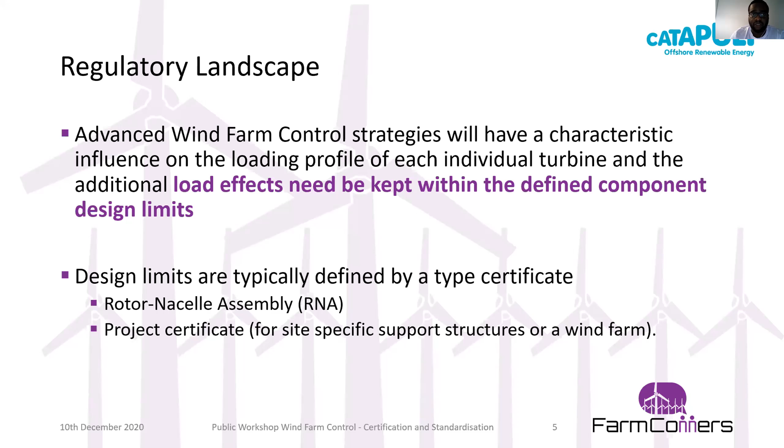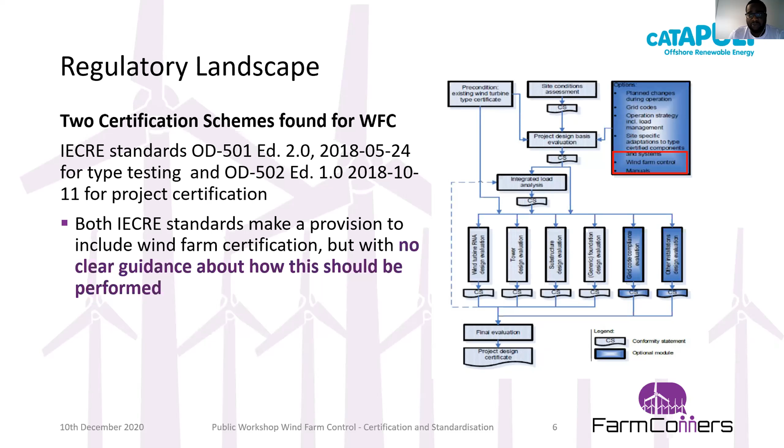In terms of certification schemes, what we found out was there are two certification schemes for wind farm control, both IECRE standards listed here. As much as they are there and there's a mention of wind farm control, what was noted is that there was no clear guidance about how these should be performed in these documents. And that's just a diagram that summarizes the certification scheme in the document.

Another aspect is the DNV GL service document, where in the updated version to be published in 2020, wind farm control is to be considered in the site-specific design assessment, SSDA. That's the diagram on the right. This includes a minimal analysis or review of the listed bullet points, such as the wind conditions of the site, the wind farm influence, site complexity analysis, and site-specific extreme loads.

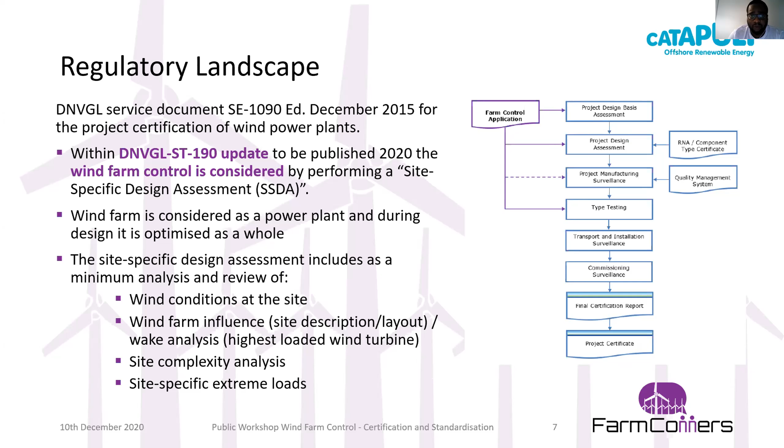The other aspect is farm control functionalities, which was more about the different novel control approaches being used at the moment, and there was a review on some of them. These are the two listed out of the document: axial induction and wake steering. Axial induction has to do with modification of the energy harvest of either upstream or downstream turbines, so that the wake interaction effects can be mitigated.

The challenge we see there is that although this is seen as one of the techniques that could foster wind farm control, wind tunnel tests and field tests still call into question how this might actually be used for wind farm power increase.

Wake steering is when you use yaw misalignment, which is one of the more promising techniques, and steer the wakes to modify how the downstream turbines react, reducing the wake interactions in the wind farm. That's seen as a promising technique, and it has also been tested in real wind farms.

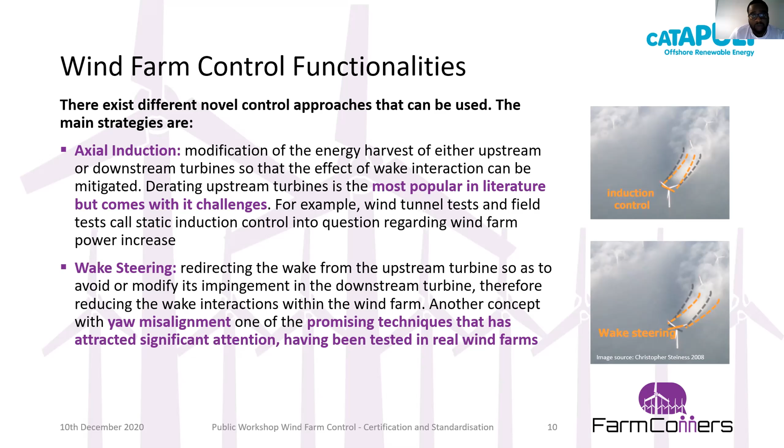There's some other ones mentioned in the document, which everyone is open to have a look through as well. And so we did a review on that. We also looked into aspects that have to do with the integration into the existing wind power plant

control of wind farms. And what was proposed here was the hierarchical design requirements way of doing this, where there's a 3-level hierarchy, the lowest level based on optimizing the energy harvest from the wind farm, and the very high level focus would be the safety and structural integrity of the wind farm as well.

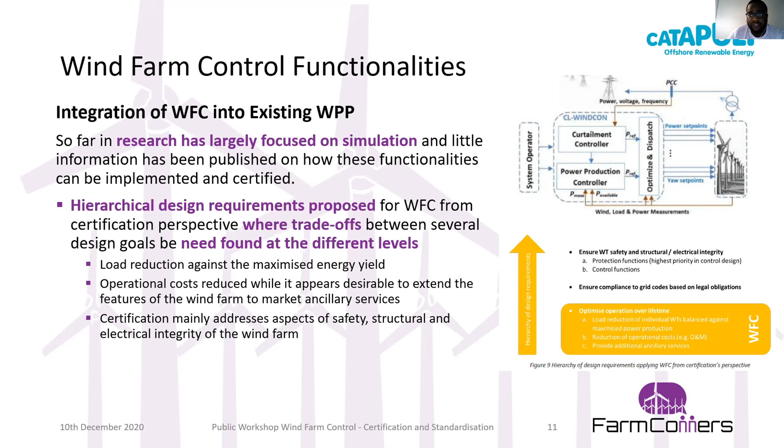So in here, one of the things we discuss is that there needs to be some sort of trade-offs between the several design goals, which need to be found at those different levels as well. And the list of bullet points here explains a bit of those, such as load reduction against maximized energy yield, and certification issues, which mainly address aspects of safety, structural and electrical integrity of the wind farm.

Wind farm economics was another aspect looked into in this position paper. And in here, we reviewed the different electricity markets. And the summary here was that for wind farm control to participate in electricity markets, this would depend on having very robust algorithms or control systems that can coordinate the control actions.

Also adhere to the different market participation rules, and also importantly abide by the grid codes for the normal operation of the wind farm. Two recent developments were noted in this report.

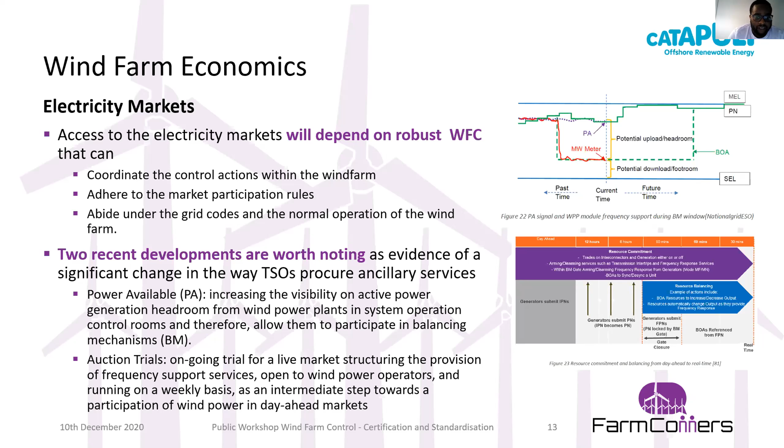One was the power available scheme, which is where the wind farms are allowed to provide headroom capacity, and that's sent over to the TSOs in their operation control rooms, so they have an idea of what that headroom is, and you're able to participate based on that in markets such as balancing mechanisms. Also, auction trials, which open up the wind industry to different markets such as the day-ahead and intraday markets as well.

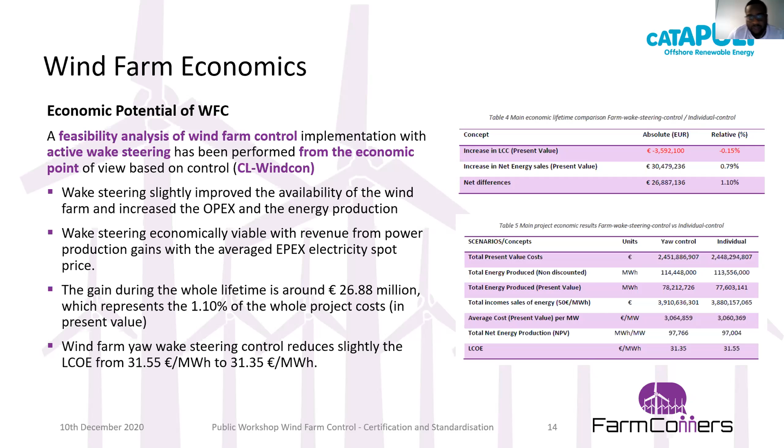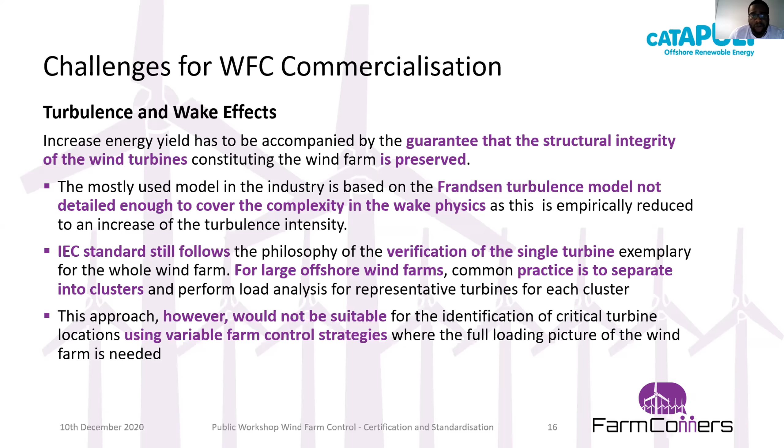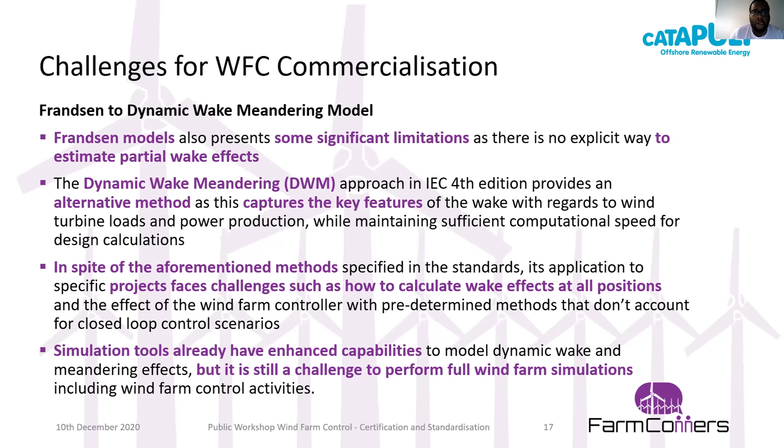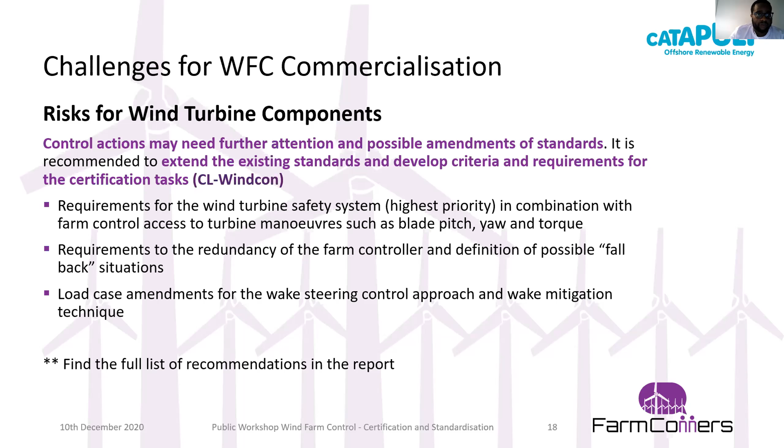Finally, in challenges were the risks for the wind turbine components. Here was a list of recommendations, which was to develop the criteria requirements for certification, to go a bit further in terms of the standards. Three are listed here, but there's a full list of the recommendations in the report, which you could look at in detail at a later point.

And finally, the proposed solutions. I think Nikolai will be giving a bit more detail in a couple of minutes on the first two, which were temporary and conditional product certification. This is an approach which extends the conventional site-specific design assessments to include additional inputs for wind farm control strategies, and also how risk-based certification can be carried out to issue certificates, to help assess the safety concerns with the wind turbines and the wind farm.

Finally, the proposal was also to see how we can start to use regulatory sandbox approaches, which are ways where you could implement novel strategies with an exception from the obligation to comply with existing regulations, such as grid codes, and gives a safe room to do trial studies with these wind farm control techniques when developing them.

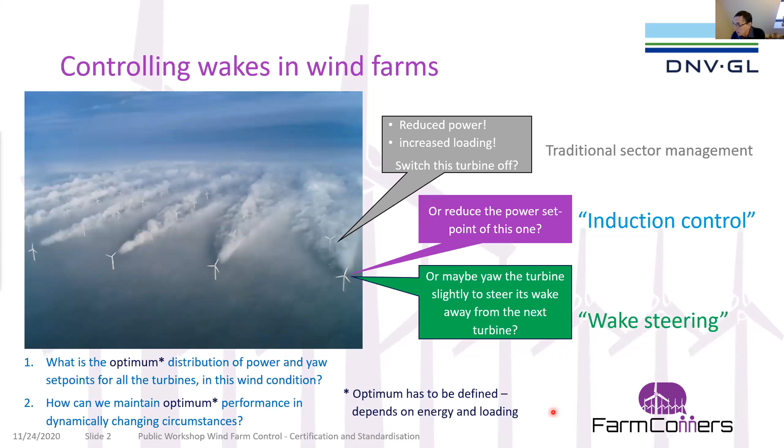Okay, good. So this is about turbine loading in wind farm control: requirements and modeling approach. And the next slide, yes. Well, I don't need to spend time on this one. This is just showing the difference between steering and induction control and the need to find optimum set points for turbines in the wind farm. And how do we define the optimum? Because it depends on energy and loading. That's another old slide.

Modeling requirements for this. So we are concentrating on the engineering models here, which are fast, but in some senses low fidelity models. We need to have a detailed representation of the turbine wakes in different atmospheric conditions. We need to be able to model realistic time varying wind conditions, accurate modeling of turbine control dynamics, and we also need time domain simulations long enough to capture the low frequency variations in wind conditions, hours or days or longer.

But we need to have a short enough time step for the simulations to be able to capture the main turbine wind farm control dynamics, which are important for this. So something like a 1 second time step or something of that order. And this has to be fast enough to do many repeat simulations for design iterations. So that's why we choose the engineering model approach for this rather than high fidelity flow models like large eddy simulations, which are just too computer intensive.

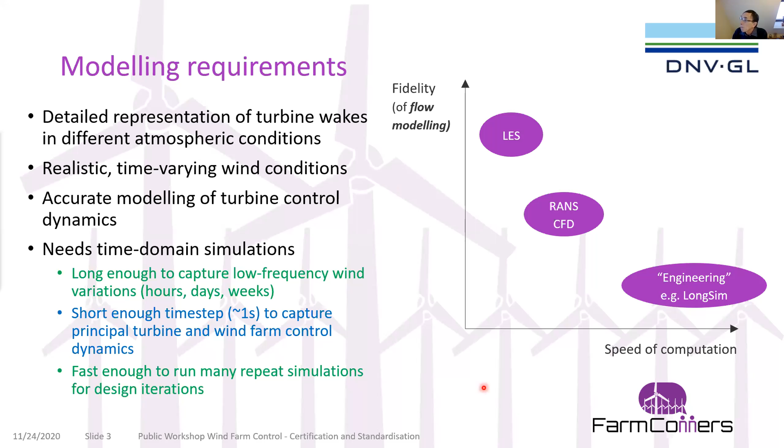So we have a time domain simulation model called LongSim, developed at DNV GL. This contains a choice of different engineering wake models, which are simply embedded in a stochastic wind field, as you can see in the simulation there. For example, Gaussian wake profiles from either the Ainslie or the Bastankhah models, different options for wake turbulence, different options for wake superposition, lateral deflection due to yawing, and so on. It models wake meandering and advection, the turbine details, including the supervisory control. So, for example, in this simulation, you can see the yaw system dynamics going on. This is a wake steering simulation.

And the wind farm control algorithm needs to be able to estimate wind conditions from turbine signals, look up set points and implement them in some realistic way in the time domain. This is actually a simulation of a row of turbines at Sedini Wind Farm, which we used in the CL WindCon project. The wind field is generated from historical site data, in this case from a met mast, which gives conditions at one point, but we can generate from that a whole wind field representative of the site. Then we use this to test and tune the algorithm details. We can test it against different wake models, and evaluate the power increase and operational parameters like the amount of yaw duty and so on.

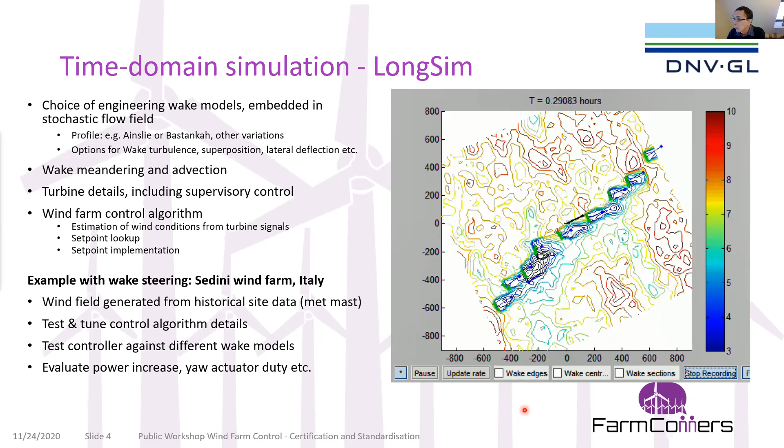This shows the design process. So we've got the LongSim model here, which is capable, first of all, of doing steady state set point optimizations, where we look at all sorts of different wind conditions and calculate the optimum set points for the different turbines in each wind condition and generate a big lookup table of set points. We adjust those for robustness to account for uncertainties in wind conditions, because you never know what the wind condition is precisely, and actually it varies across the wind farm. It's never the same everywhere anyway.

We then build that into a dynamic wind farm control algorithm, which has the task of determining the wind conditions from whatever measurements happen to be available, and then using this robust lookup table to generate set points, which are then manipulated appropriately before sending to the different turbines. And then LongSim does the dynamic simulations using a realistic wind field made from site wind data to evaluate the performance in time domain of this control algorithm, and we can iterate around the loop to adjust the dynamic parameters of the controller. The simulations give us the performance, the energy production, yaw system duty, loads, and so on.

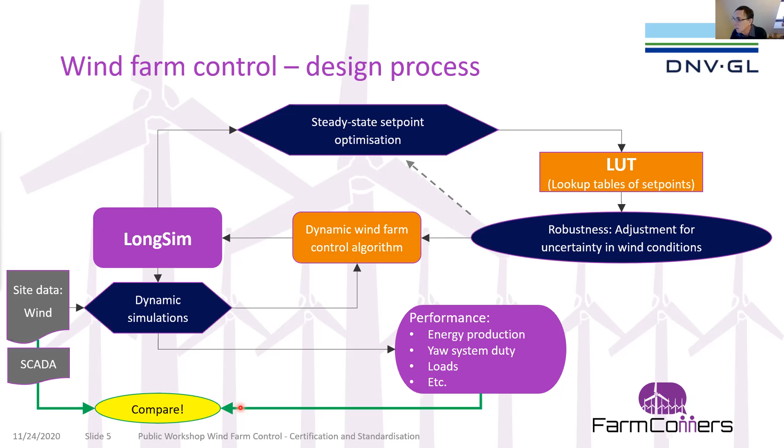And the nice thing is that we can run a test on site. We can use SCADA data from during the tests to generate a wind field, which allows us to model the behavior of the wind farm to mimic what it was actually doing during the tests, and we can compare the simulation results against the SCADA data. That's a very useful diagnostic tool, as we discovered in the Sedini tests, which are here. In the CL WindCon project, we were actually doing some induction control tests on this row of turbines in green here.

So we did that design process. We developed a toggle test where we switched the control on this row of turbines on and off at regular intervals, so we could compare the behavior with and without, and we did some companion simulations. And this is just a result showing the power in different wind speed bins with and without the control, showing a small increase there. This is points per bin.

And these are the companion simulations where the actual SCADA data is compared against the LongSim predictions using the wind field generated from SCADA data. This is power at a turbine. This is the set points at a turbine showing toggling on and off. So that was very useful.

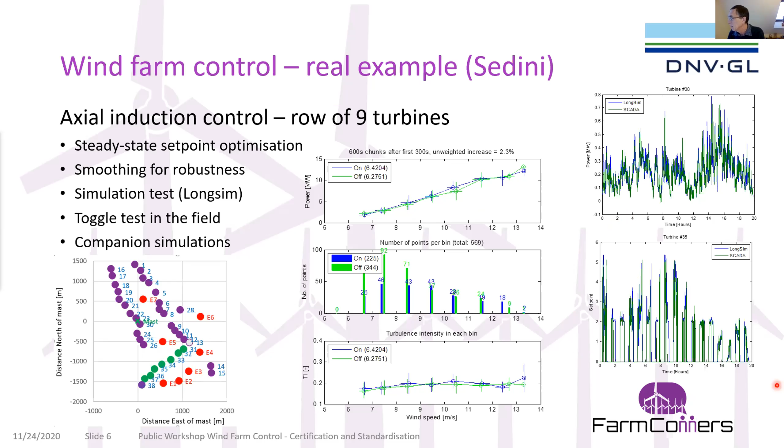So what about the loads? Loads obviously very important. Site-specific load calculations, you'd ideally look at every turbine in the wind farm, in every wind condition, every wind direction. If you use aeroelastic tools, that can be quite prohibitive. So wind farm control changes the loads. So the turbines whose set points are being changed, you'll see different loading. So for axial induction control, you get rotor speed and pitch angle changes, which will generally reduce thrust or mostly reduce the loads on that turbine.

Large yaw misalignments if you're doing wake steering, which will make some of the loads higher and some of them lower. So it has a mixed effect on the loads. And then if you look at the turbines who are wake affected, they will see increased wake velocities, which increases some mean loads, but generally fatigue loads will reduce due to reduced wake turbulence. There will be changes in partial wake immersion, which affect the asymmetric rotor loads, and different loads will be affected in different ways. So it's a very complicated picture.

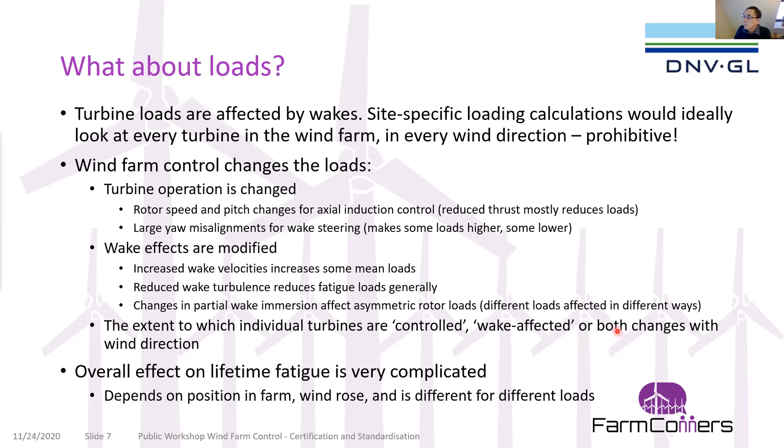And of course, the extent to which each turbine is either controlled or wake affected or both changes with the wind direction. So the annual or lifetime effects on loads, it's a very complicated picture. So how do we model these loads? Well, to use a fatigue loads database. This consists of many thousands of 10-minute dynamic aeroelastic simulations, for which we would use Bladed, but there are other tools, covering a multi-dimensional hypercube of different conditions, so different wind speeds, turbulence intensities, wind shears, yaw misalignments for wake steering, or delta set points for thrust reduction in axial induction control.

We can model the single wake effects in Bladed, but the database, if we wanted to do yaw misalignments properly, wake effects properly, we would have 3 or 4 more dimensions for different centerline velocity deficits, different wake widths and centerline offsets, and it still wouldn't account for wake meandering and propagation dynamics and crucially multiple wake superposition effects. At the moment, the only way we have is to change the turbulence intensity if you're in the wake, and that's clearly not an adequate representation.

So I'm going to talk about a new approach where we're doing short targeted simulations to identify deterministic load contributions from wind shear, yaw, partial wake immersion, gravity, and so on. And then we fit simple empirical models to these results. Then we do a small number of stochastic simulations with turbulence to identify transfer functions which embody the effects of turbulence and structural dynamics on the different loads. And then we can combine all these different load contributions together, the deterministic and stochastic contributions in the time domain, to get the total loading. And that requires a leap of faith that we can actually combine these loads, but it does actually seem to work quite well. And in that way, we can deal with multiple wakes and so on in a consistent way.

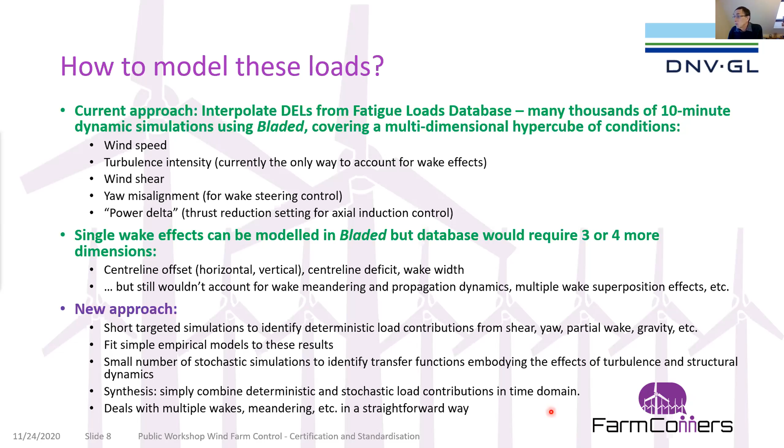So to illustrate this, we separately model the deterministic effects of wind shear, yaw, partial wake, and so on on each load. We identify the effect in terms of the 3P Fourier harmonics which are generated, also the 0P or mean levels where appropriate. And we could easily extend this to 6P and other harmonics if necessary, but these are pretty small effects. And then we fit simple functions to predict the amplitude and phase of each of these Fourier harmonics as a function of whatever the driving effects are.

So here, for example, we see the amplitude of the 3P component of a tower base MX load as a function of the wind shear exponent. And you can see some actual simulated points with Bladed and the fitted model, which is the red line. Here we have yaw misalignments, and in this case I've chosen tower base MY moment, and this is the 3P contribution as a function of yaw misalignment.

Here we have the 3P thrust contribution and the Fx load on the hub, as a function of a parameter which actually combines different wake parameters, different partial wake immersion parameters, so wake deficit, wake width, center line displacement, this sort of thing. So there's not a nice simple line you can plot through these results because they're all different effects, but you can see the difference between actual and predicted.

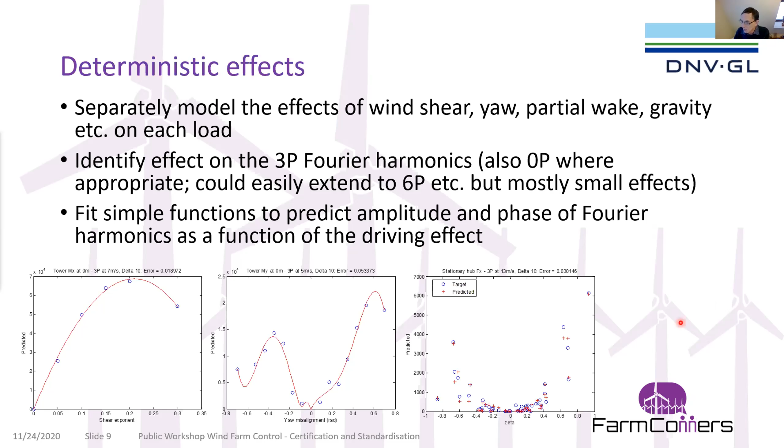So those are the deterministic effects, and for the stochastic effects, we calculate these transfer functions from wind speed to each of the loads with no deterministic effects, and they're just purely the turbulence and the structural vibrations. And we repeat for each wind speed and for each axial induction set point. Now these transfer functions are largely independent of turbulence, which is very useful.

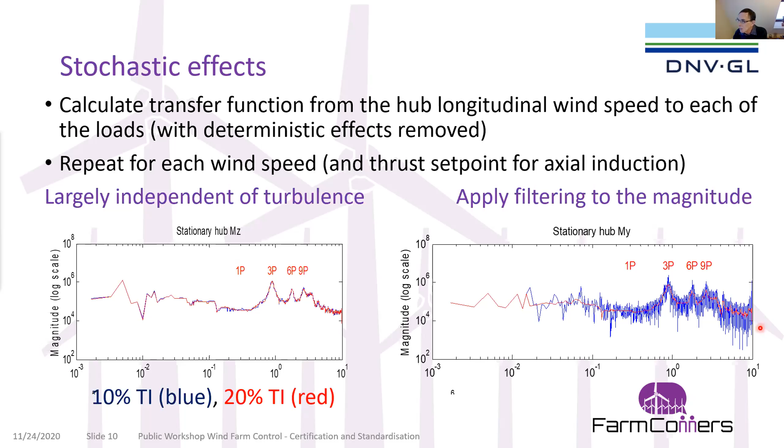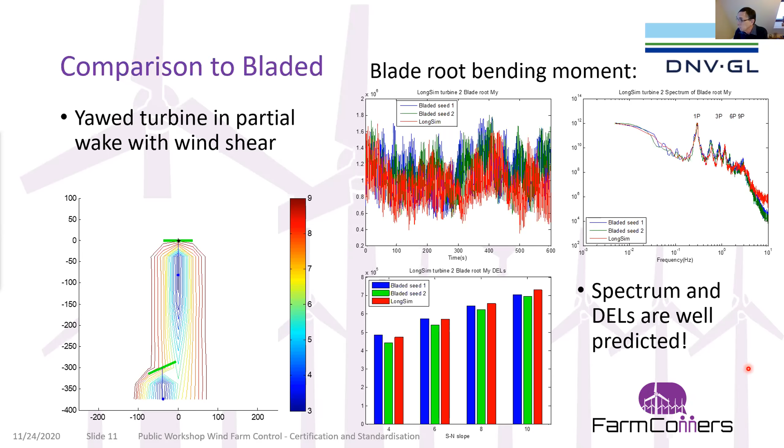And down here we have the damage equivalent loads for different Wöhler exponents for this particular load. So again, very good prediction. So that's very reassuring. And so we say we can extend this now to model situations which Bladed can't deal with, such as multiple wake immersion, wake superposition, and so on.

This is just a little study using the model and also using Bladed, because it's something you can do with Bladed, which is just the effect of yaw misalignment on the loads. This is important for wake steering. I've illustrated here the nodding moment. And this is the mean effect here. So with a negative yaw angle, we get an increase in mean nodding moment. For positive yaw angle, we get a decrease. And this shows a couple of Bladed seeds and the LongSim prediction using this model. And they're telling the same story, not identical.

Here is the damage equivalent load on the same load, the nodding moment. And in this case, the green and purple are the Bladed simulations with two different seeds. So a lot of seed variation there. And the new model is giving a very similar result, which is well within the range of the different seeds. So it's showing the same story, which is that the highest load is at 0 yaw, and then there's a bigger reduction at positive yaw than negative yaw.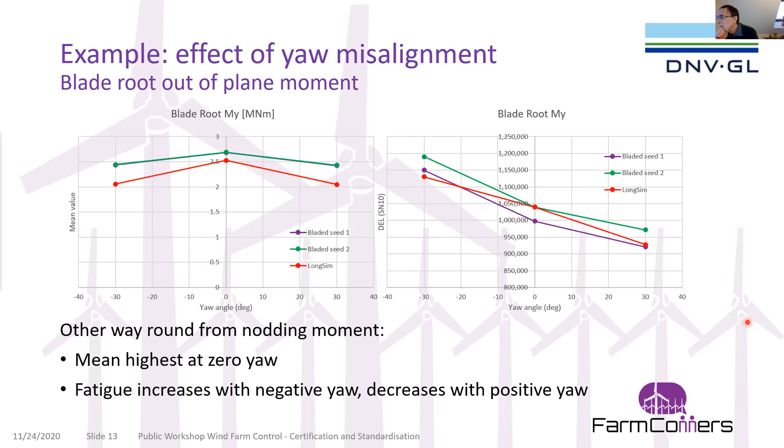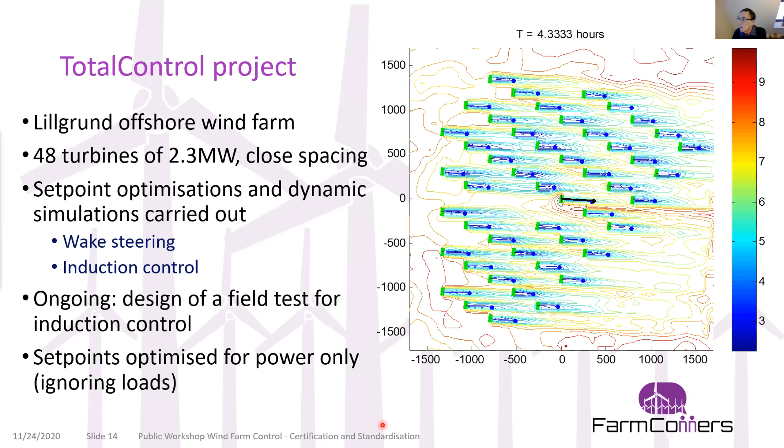A few slides just on the TotalControl project now, where we've seen this Lillgrund wind farm already. 48 turbines closely spaced. We've done some set point optimization and dynamic simulations using wake steering and induction control. We're currently designing a field test of induction control for this wind farm. We've been optimizing set points just for power, ignoring loads, because we won't be able to measure all the loads on the wind farm. But then we've repeated some simulations, optimizing also loads, and this is an illustration of that.

So the first optimization is power only, and the second optimization is for power and loads. And here, just as an arbitrary choice, just to illustrate, I've put a 90% weighting on the total wind farm power and a 5% weighting on the maximum blade root damage equivalent load, Wöhler exponent 10, the maximum value on any turbine in the wind farm.

I'll put a 5% weight on that. It's just for illustration, the sort of thing you can do. The tower base MY, I've used the sum of the MY over all the turbines, and again, the 5% weight. That's a pretty arbitrary merit function, but we can choose whatever we like. We could also use the difference in loading across the wind farm between the turbines to try and even up the loading across the wind farm.

So power only optimization gave a 1.7% increase in power, a large decrease in blade root fatigue, 35%, and a significant decrease in tower base fatigue. So although it's a power only optimization, the loads are coming down very nicely across the wind farm.

This is the optimization for power and loads with this very arbitrary choice of weightings. And the blade root fatigue has come down some more because we put a weighting on it. But that's at the cost of not achieving quite as much power increase and also not as much tower base fatigue. But actually what this one tells us is we don't really need to put weightings on these loadings because we're already getting very significant load reductions.

Finally, this is some time domain simulation with these loads. So simulating the loads as well. I'm simulating the entire wind farm, the loads on all the turbines in the wind farm. And I've just picked out 3 turbines here for illustration. The black one is upwind, the green one is very wake affected, and the red one's in the middle.

The top simulation is the base case with no control, and the bottom simulation is with the axial induction control active. And this is the axial induction control just optimized for power. But you can see that the loads have come down quite a bit. This is the summary here.

So for the upstream turbine, the black one, the mean load, this is the blade root bending moment, sorry, that I'm illustrating here. It's a 3-hour simulation. The mean load has come down, the standard deviation has come down. I could also calculate damage equivalent loads here. I haven't done that here. I ran out of time. Turbine 4, the mean and the standard deviation have both come down.

The green turbine here right at the end, very heavily wake affected. The standard deviation is still coming down a bit. The mean has actually gone up slightly. The fatigue would have come down if I calculated the damage equivalent load. So it's just an illustration.

So conclusions, this surrogate loads model accounts for wake effects in detail, gives good agreement with Bladed when you can compare directly with Bladed, and allows loads on all the turbines in the farm to be evaluated much quicker than with aeroelastic simulation.

We use a relatively small number of training simulations compared to the standard database approach, and they're shorter simulations, many of them, because they're just constant wind simulations to get the deterministic effects, and relatively few turbulent simulations for the stochastic effects. We can do the set point optimization, including the loads, and then we can do these time domain simulations, also including the loads. So that's, I think, going to be pretty useful.

These are the 3 projects that I've referred to. This is obviously FarmConners, but there's a lot of work that's gone on in CL-Windcon and TotalControl. And any questions?

Hi, Ervin. I have a single question. Hi. Thank you for your nice presentation.

So when you do the optimization, including both loads and power production in the objective function, how do you then balance the loads and power production in this metric? Yeah, so what we do is apply weightings to the different terms in the cost function. So we can apply different weightings. There's always a big weighting on the power production, because whatever you do, you certainly don't want to lose power production, and probably you want to increase it.

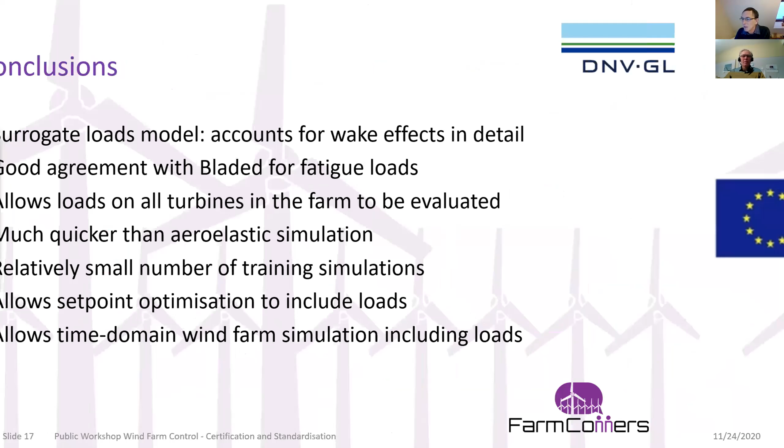But what I wondered a little bit about was that for the example you showed, it almost seems that the power production metric outperformed the load and power production metric also on loads. Yes, that's right. So that example, let's just get back to that one, was this one. It was a very arbitrary choice of cost function, just to have something to illustrate, to be able to quickly produce some results for this presentation.

But what's happening here is it's obviously very difficult to further reduce the blade root bending moment. So I've put in this loading, and it has managed to squeeze in a bit more reduction, but only at the cost of the other terms in the cost function doing less well. So I shouldn't have this weighting on the blade root bending moment, because we've already got a massive reduction in blade root bending moment. So there's no point in trying to do even more.

So if I did this again, I would choose some different metrics here. Even the tower base is already quite massively reduced, so that's very nice. I could try and reduce that some more, but I certainly don't want to squeeze more out of the blade root bending moments. So we can play around with these weightings. These are just two shown for examples, but probably more relevant might be the variation between turbines across the wind farm in, for example, tower base fatigue.

And actually the next job I'm doing for TotalControl is to do exactly that. I'm looking at when the wind farm is curtailed, so that you're reducing total wind farm power. How do you do that to have the best effect on loads? I'm going to use this same scheme. So I can look at, for example, the variation in tower base fatigue and try to even that up across the wind farm as much as possible for a given power reduction.

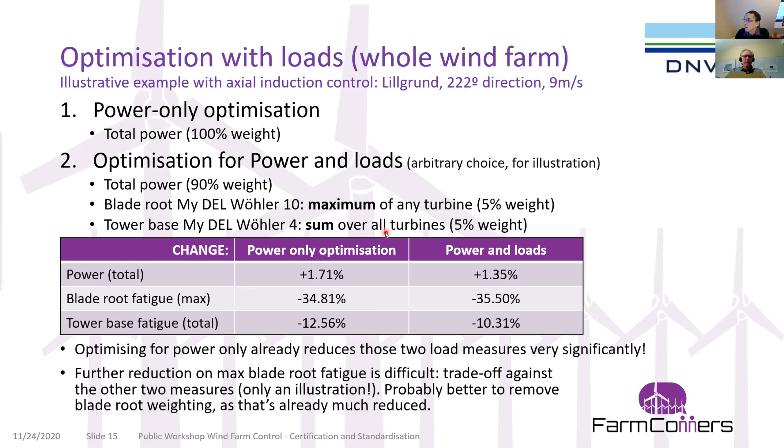Ervin, thank you very much for this excellent presentation and these exciting results on LongSim. I was really surprised to see the good agreement of LongSim fatigue damages with Bladed, which has a full BEM aerodynamic model with everything in it. It seems that LongSim is able to predict the loading based on this big database for a full wind farm. And then it would be possible to identify maybe the most loaded turbine within this full wind farm, isn't it? Yes, absolutely.

So on the next slide here, if I look at the results of these simulations, I've just picked out 3 of the turbines, but I could very quickly calculate the damage equivalent loads for all those turbines from the time history loads that I've generated there. So that would be a very quick step.

And do you think it would be possible then to have a site-specific certification, maybe, if there is an operator saying, I would like to know which lifetime or which damage I have, the minimum lifetime, which turbine would be the most loaded turbine, to do this within a certification procedure?

Yes, I think you could. So you would have to define, obviously, the wind roses. Yes. To define a set of conditions to look at. And for each of those conditions, you could run a simulation. I mean, you can do it in steady state also in LongSim, which is even quicker because then you don't have to run the time domain simulation.

But the time domain simulation will be more precise, but then you're relying on doing particular simulations, so you might want to run different seeds like you do with Bladed for single turbines, this sort of thing. But yeah, absolutely, this could be used.

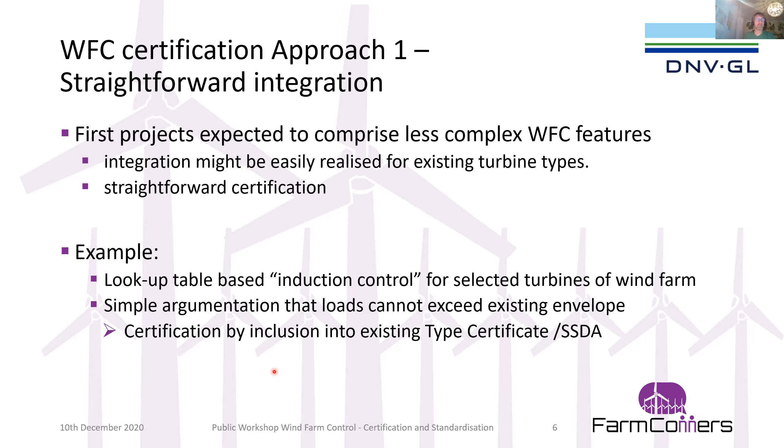The second approach would be a risk-based certification. So for the situation now where we still have limited guidance for wind farm control in existing standards, we might miss clearer details how to proceed for certification for more complex wind farm control designs. And there we can offer an approach named technology qualification, where we together with the wind turbine OEM would dive into the technologies applied and identify risks for that approach. And together we would also identify how these risks can be mitigated.

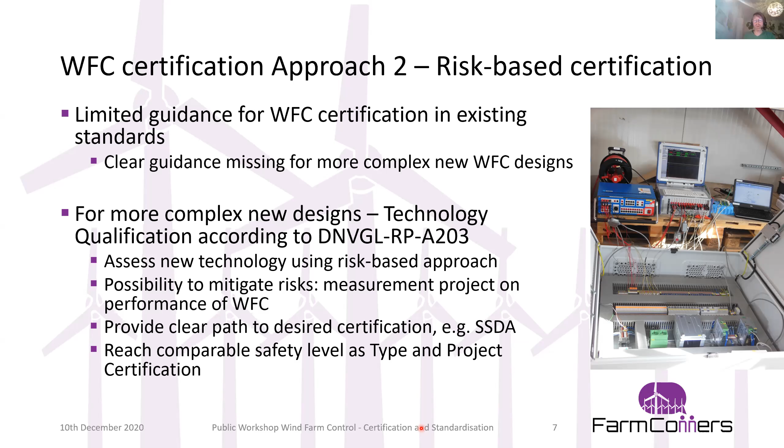And this technology qualification approach will provide a clear path, so to say, a cooking recipe, how to reach the desired certification, like site-specific design assessment. And if this recipe is followed, we'll have in the end the same comparable safety level as with a type or project certificate.

And the third approach is called here certification facilitated by measurements. In our new service specification for project certification, we have a new section named wind farm control, where we propose for the application of simulation models or tools, as we heard about in the last presentations, an approach where validation has not yet been performed to the level that would be necessary for certification to ensure good enough safety in this aspect.

And there we would propose the approach that the load simulations by the wind turbine OEM would be performed using these tools and wake models anyway, while the assessment will be done on plausibility checks only, on a little bit lower level, but we will issue a conditioned site-specific design assessment, including this wind farm control, which will have a limited validity.

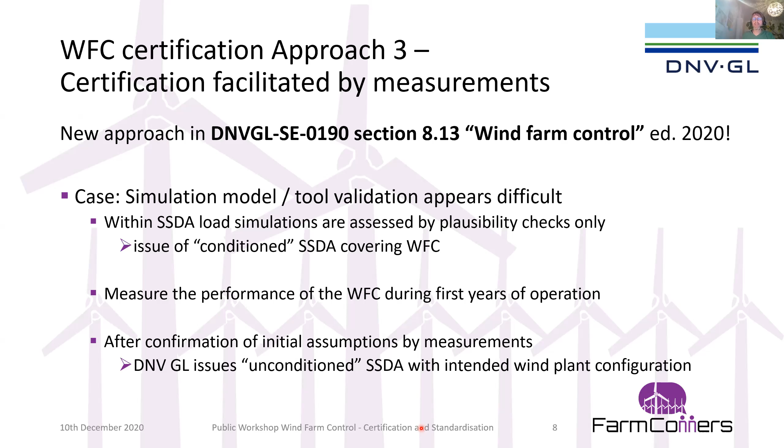And during this period, a measurement project will be set up to accompany the wind farm with measurements during the first year of operation. And then the results of these measurements will be compared with the initial assumptions from simulation. And if the assumptions can be confirmed, then we can issue an unconditioned site-specific design assessment with the intended configuration. If there are still deviations, it might be necessary to mitigate the deviations, for example, by modifying the control to some extent, or changing the expected lifetime so that the assumptions can be met.

In the following, I'd like to talk on the interviews we made. So the first one is about the interviews with wind turbine OEMs. And they said that they would perform a site pre-analysis for a new wind farm to be set up. And they would use initially simulation tools like FastFarm or Floris, knowing that they cause very much computational effort. And so this is for understanding the situation on this site, but they consider these tools as too laborious and impractical for load analysis and also for certification. And as a certification body, we can understand that to some extent. And we'll, as Ervin proposed, hopefully soon have other ways to validate those wind farms.

Instead, the wind turbine OEMs prefer to have a risk-based approach for certification, as I also described with this approach. And they even appreciated the certification facilitated by measurements, but only as an option for wind farms to be retrofitted with wind farm control, because they considered that for a completely new wind farm to be set up with wind farm control, the investors would not very much like to have a limited validity of the certification, but for a retrofitted wind farm, this could be an option.

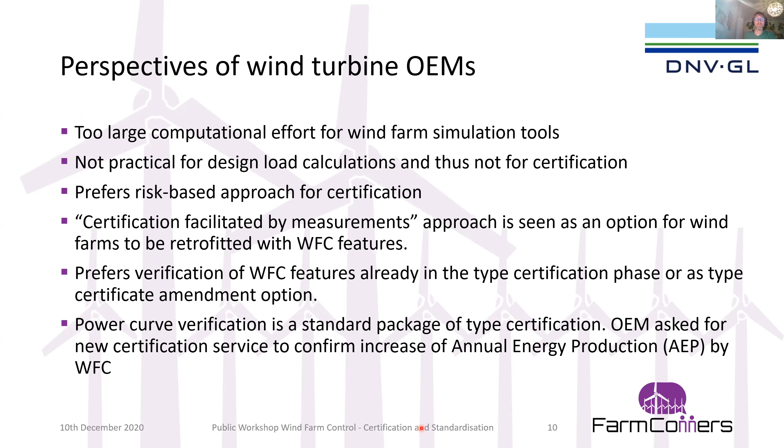And we were asked about verification of the power curve and about the annual energy production of the wind farm with wind farm control, as power curve verification belongs to type certification of the wind turbine, and if this could not be a new service coming also from certification.

Now jumping over to the perspectives of operators. So the operators said that wind turbine OEMs would only slowly be ready to include wind farm control features in their wind turbines to sell. So they are now implementing what is required for grid code compliance and for requirements they have for marketing the electricity, but still the focus is not very much on functionalities regarding the optimization of loads or of annual power production. That just seems to start.

What can be said is that definitely operators will only implement wind farm control if the risk is low or manageable. And what is also important is that the wind turbine OEMs provide an interface between the operator's approach to the wind farm and the actual wind turbine to allow the operator routing of their set points for power, for example.

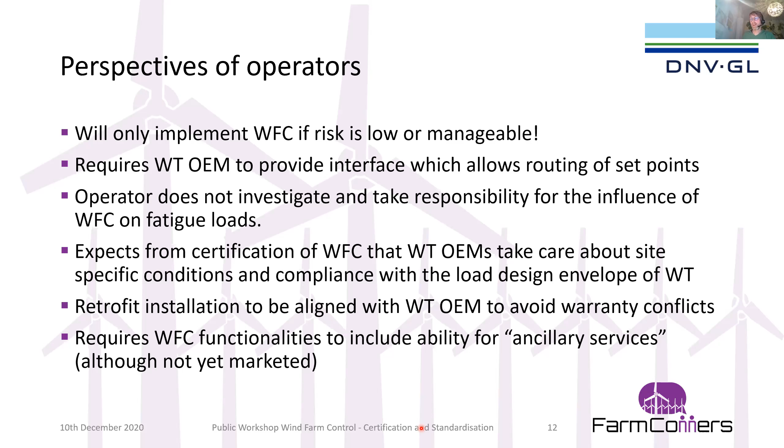The operators said that a retrofit will only be applied to a wind farm in alignment with the wind turbine OEMs to avoid any warranty conflicts. And the operators said that the functionalities for ancillary services, which there is also a lot of talk about nowadays, although they haven't yet been marketed to a larger extent, should be implemented already now into the wind farms if they are to be used later on.

I want to close with DNV GL's perspectives and also conclude on the interview's feedback. So although it is requested in the interviews with wind turbine OEMs, classic certification does not address annual energy production and optimization tasks. So this is something not required or not dealt with in certification. Instead, certification will have an eye on the interface between the wind turbine and the operator, so that there is no harm on the loading.

And we are naturally also aware that with wind farm control, the load simulation efforts can increase very much considering all wake effects and failures, as Ervin addressed, and we need to see how we can limit that. Two additional points I would like to raise: from a certification point of view, we think that atmospheric conditions will become very relevant for wind farm control, and that they will be a relevant parameter for site assessments for wind farms with wind farm control. And thus the controllers to be used will also be site-specific in their design, and we propose this also for certification to investigate.

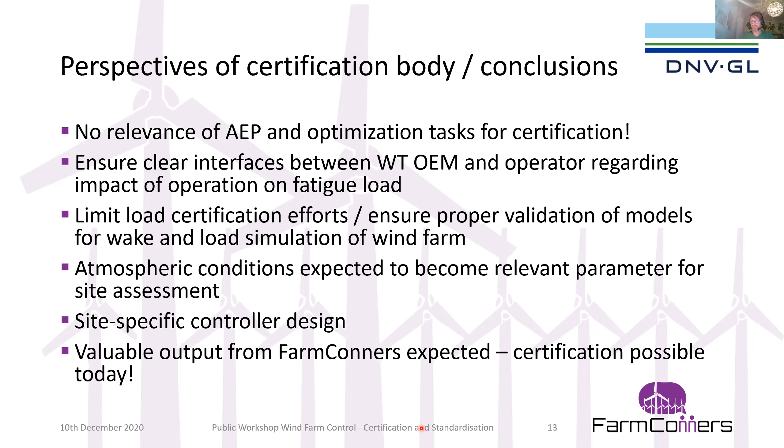We are expecting further valuable output from the EU projects FarmConners and TotalControl during 2021. But yeah, I'd like to point out that certification is already possible today. So you are very welcome to speak to us in this respect. And I'm looking forward to any questions from you now.

There is a question from Mr. Schlesselmann regarding the atmospheric conditions. What did you mean by this? The atmospheric conditions, stable, unstable, neutral, will have a significant impact on the performance of the wind farm. We'll have to consider shears, veers, negative shears, and that will be decisive on the performance of the wind farm and the expected outcome. And I believe that this should be considered also in the site conditions to analyze as an input to the design of the wind farm, and this should also be reflected then in certification, at least noted.

Before that, I can start by saying a few words about loads, although I'm not sure whether it's still needed, considering we had quite a few talks today about it. But as it was clear in previous talks, loads in a wind farm are obviously influenced a lot by wakes and also by wind farm flow control strategies. Here is just as an example, normalized damage equivalent loads, which we got from our large eddy simulations coupled with aeroelastic code FAST, showing how the loads of a downwind turbine change with respect to its position.

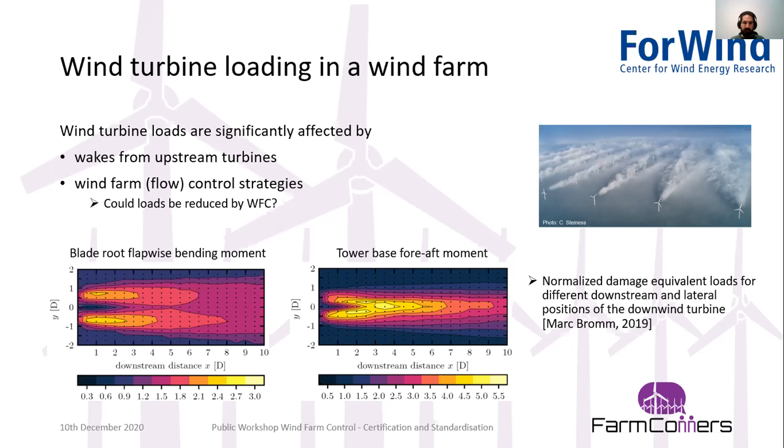So we are changing the position of the downwind turbine and analyzing how the loads change, which obviously means that depending on where the turbine is positioned in the wake, the loads should change quite significantly. That's not so new, but what we want to see now is, can we somehow reduce those loads by using wind farm control? And yeah, we think that we can.

A few words about active power control and what I mean by that. So basically it's about contribution to the power grid stability by adjusting the produced power of a wind farm. The idea is that the transmission system operator provides a power reference that a wind farm should track depending on the needs from the power grid. And then the wind farm controller should distribute this power reference to individual turbines in order to really produce the needed amount of power.

So how to do it? Well, the simplest approach you can imagine is obviously an open loop approach where you get a power reference from the TSO and you simply distribute it among the wind turbines. The simplest approach here would be to say each turbine has to do the same amount of work. So if you have 10 turbines, you simply take the power reference of the wind farm, divide by 10, and send this value to each of your 10 turbines. Obviously, this does not account for any disturbances, for turbulent wind, for the fact that your turbines might be in wake or not, and so on. So you might have issues following the power reference like that.

So a logical extension of this would be to close the loop, to basically use the produced power of a wind farm as a feedback. And if this does not correspond to the reference, you adjust the power references sent to the individual turbines. This obviously should work better, but notice here that I still didn't say how to actually distribute the total reference to individual turbines. So how to say which turbine should produce more, which turbine should produce less. And this is actually an additional degree of freedom which we can use in order to control the loads. So this is what we are proposing.

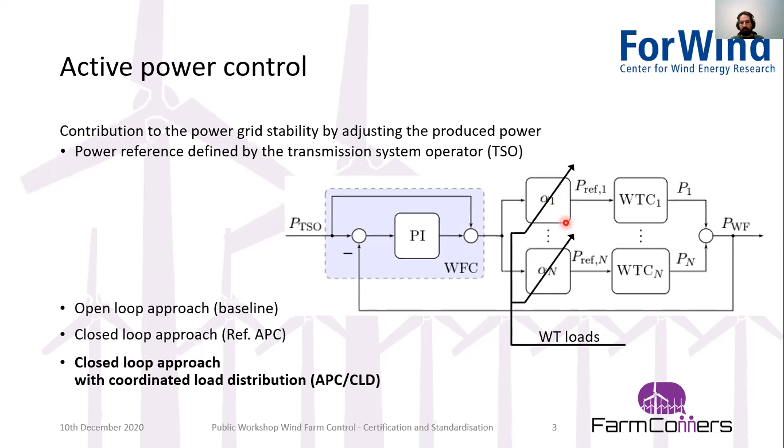Based on turbine loads, you can adjust how much each of the turbines is contributing to the total power production. And what we will analyze in this talk is focusing on tower base bending moments, and simply saying if one turbine is having higher tower base bending moments, then it should contribute less to the power production, and vice versa. If the loads are lower, then it should contribute more to the power production.

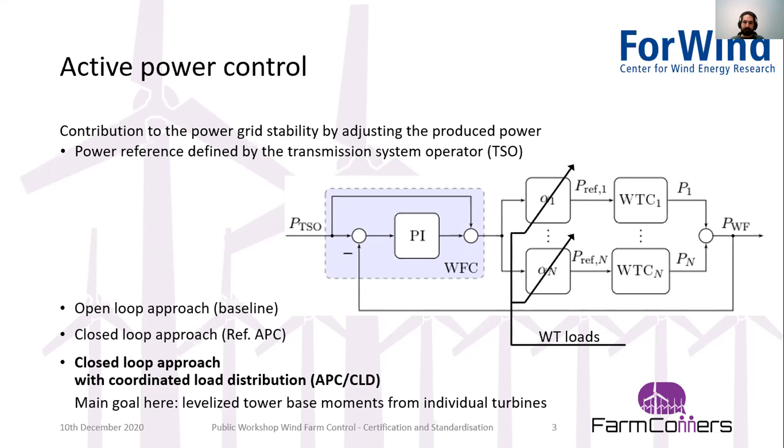This can be done with a very simple control structure where you simply have a PI controller for each turbine, comparing its loads with the other loads in the wind farm and adjusting the contribution. In order to validate this, we run large eddy simulations in the code PALM, and we used a relatively simple turbine model, but extended with tower loads in order to have an idea how this control concept can actually change the tower loads themselves.

First, what I would like to show is the response of the power of a wind farm, where we see how each of the three concepts behave. The blue line showing the open loop approach clearly shows that this does not really achieve very good power tracking because, as I said, it does not take into account wake effects and other disturbances that you might have. On the other hand, two closed loop approaches follow the power reference quite well.

And this is, I think, important to emphasize. So both closed loop approaches follow the power reference well, no matter whether we do the load control or not. In fact, it's a side effect, but a nice one. It shows consistently in our simulations that when you try to levelize the loads, you actually get a slightly better power tracking than when you are not trying to do it.

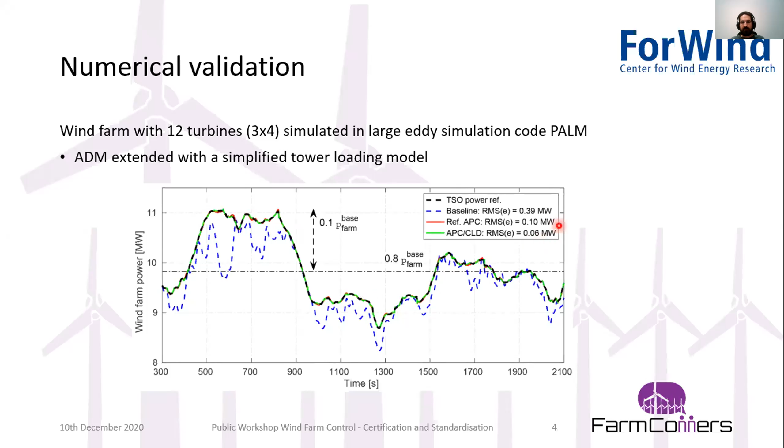Okay. Having seen the power, we can focus on the loads. And now I'm showing the loads of each of the turbines in this 12 turbine wind farm. The wind is coming from the left, so basically from here, propagating downstream. What you can see clearly is that normally the downstream turbines have higher loads, which is to be expected.

But when you start applying this load levelization, where you say that the downstream turbines should contribute less to the power production and the upstream turbines should contribute more, then you can see that basically the loads shifted from downstream to the upstream turbines. This is one thing I want to show.

The other thing is when you compare different power reserves. So if you have lower power reserve, meaning that your turbines or wind farm operates closer to the greedy operating condition, obviously the loads increase because your turbines have to do more. Basically, your downwind turbines get more often to their limit, to their available power limit, and then the upwind turbines have to do some extra work.

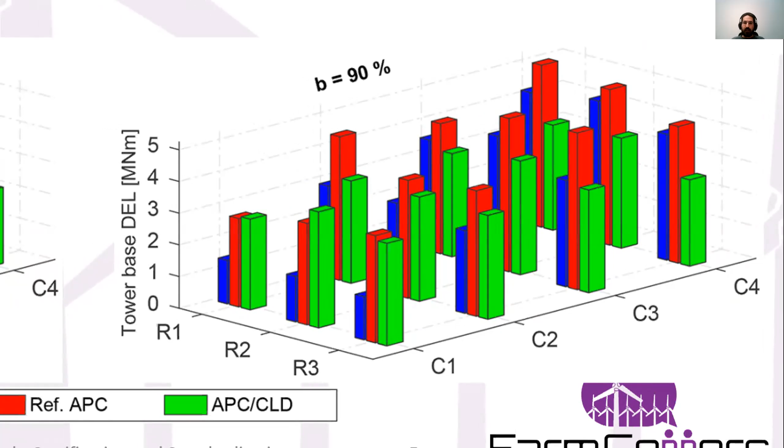And you can see that in this graph, loads overall increased to a certain degree, but still this load levelization managed to levelize the loads and have a decent, fairer, let's call it like this, distribution of tower loads in a wind farm. So the main point here that I want to make is by using a relatively simple control structure, you can already have a better distribution of loads in a wind farm.

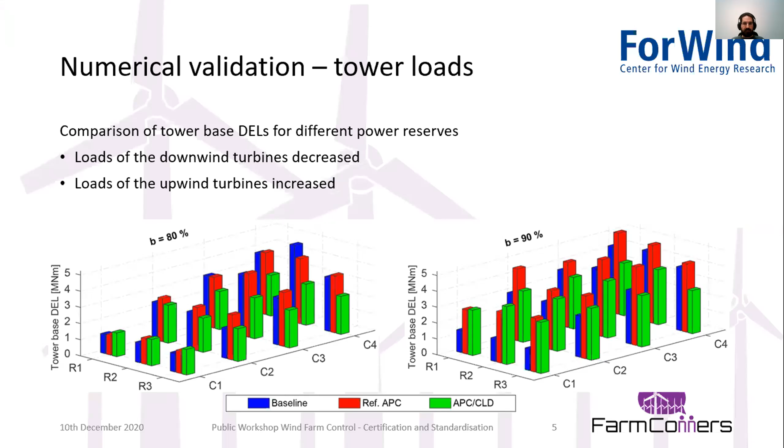This is not where we want to stop with this, so we basically are moving on with this topic. And we are now running detailed aeroelastic simulations coupled with large eddy simulations in order to have a better understanding of loads and possible gains that we can get. But also we transform this control problem into a model predictive control. We think that we got a rather simple formulation there, so it shouldn't be too complex to implement.

Another aspect is in terms of lifetime extension, because so far I was saying, okay, when we have active power control, we can levelize the loads. What's even more interesting is if you consider the loads over the lifetime, and obviously some turbines will be more loaded than the others. And then during the active power control, now we are experimenting with turbine controllers. You can say to certain turbines, now you can focus more on load reduction and don't contribute too much to the power tracking, and the other turbines take over. And by following this line of thinking, you can again achieve more balanced loading.

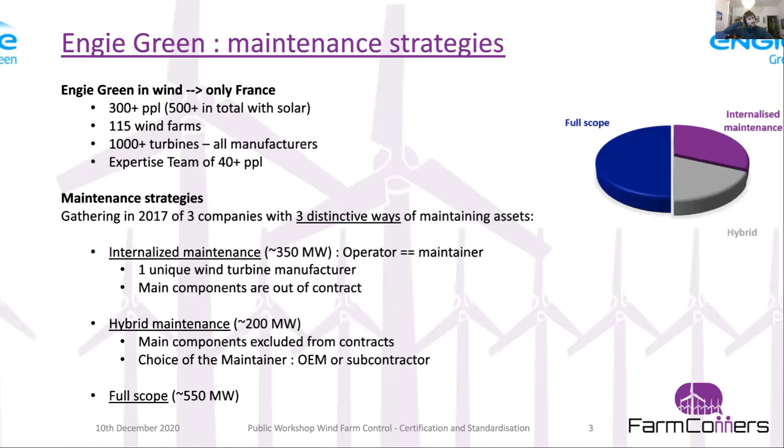Okay, so first slide. At ENGIE Green, we are around 500 people with 100 and more wind farms, 1,000 wind turbines. What is interesting is that we have all sorts of turbine manufacturers. And I already talked about the expertise team.

So, as for the maintenance strategies, what's interesting is that ENGIE Green is actually a gathering of three companies, and this happened in 2017. And I listed some bullet points, and I try to categorize a little bit the ways of maintaining our assets. The first one being internalized maintenance, which is quite interesting because, of course, the costs are reduced because the operator is the maintainer as well.

But it's based on one unique manufacturer, which is why this 30 people or so team dedicated to maintaining these assets is quite close to the machines. They do a very close supervising of the asset, and they know perfectly the turbines, which is really a strength. And what is important as well is that the main components are out of the maintenance contract actually. So again, they have a really close supervising of those main components.

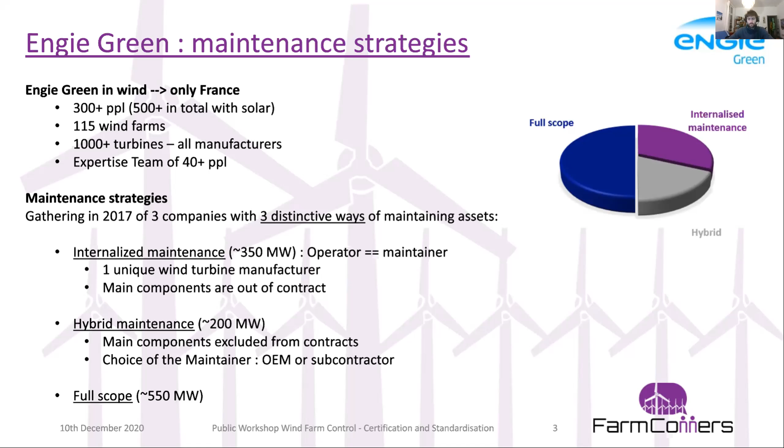So for listing the case studies, I will not necessarily go into details, but I divided these cases between R&D and retrofits. The first one being wake steering. Thomas Duc presented, I guess, some works on the SMARTEOLE project, but the idea being to deviate the wakes voluntarily, I think we talked about it a lot today, to gain production. And obviously, it's always a trade-off between the loads reduction with the wakes and the gain in production, of course, and the loads that you can expect from voluntarily introducing some static yaw misalignment.

Another example is the yaw dynamics. In this case, we tried to modify the parameters of the controller so that we play with the frequency of the yaw motor, as well as the amplitude that can be accepted for that yaw system before it realigns itself. And we took a look at the gain in production, of course, and as well at the yaw activity. And in this case as well, it's a trade-off between the yaw activity and so the loads with the gain in production.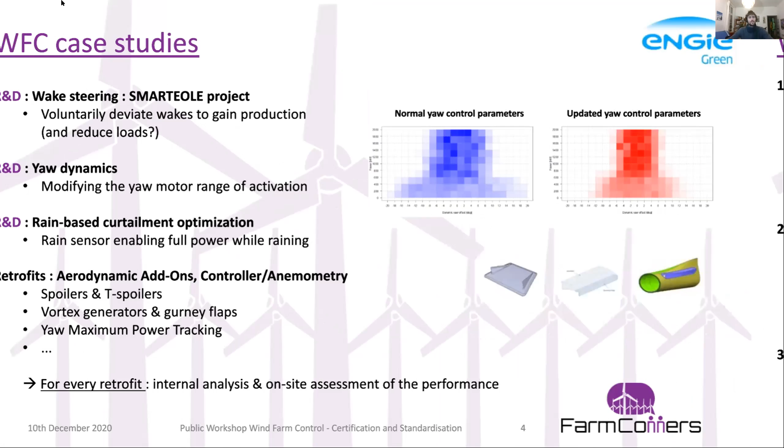For this slide, I tried to list some practical issues that we faced, and basically take a look at what we've done and try to see what we could have done better. And so we did not try to give solutions, but rather to ask questions, or to testify with all the problems that we faced during those projects.

And so I tried to categorize this when I asked my colleagues from the operations team what were their concerns with the wind farm control projects that we implemented. The first answer was loads, and I guess it's not a surprise. Then it was, can we expect any deviation from the warranty, or when the warranty will stop, what actions can we take?

Can we continue? And then, of course, the profitability. But in this case, it's easier, let's say, to prove, or at least to convince the investors that it can be a good opportunity to increase the production of the wind farms.

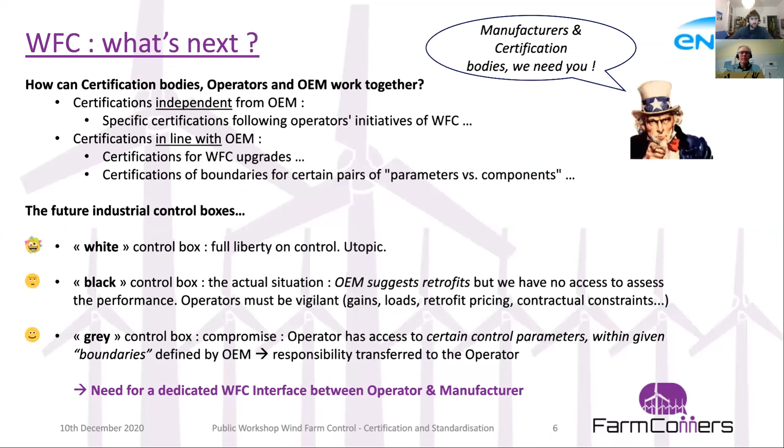I will get back to the previous slides. I think it's a very smart idea, but I think it can be very complex, you know, because of the many permutations that may arise from such an idea and the effort that is maybe beyond what an OEM is willing to do. So maybe you have an example.

That's true. I took the example of the yaw control parameters, but in any case, there is a chance that in a few months or in a few years, it will not be necessary to have it, thanks to the power tracking systems. But for example, there is a manufacturer which gives an amplitude of -20 to +20 degrees until the yaw system realigns, and some other manufacturers accept only -10, +10. Of course, it depends on the design of the blades.

We played with this range, say, and I think it's quite easy to prove and to assess that the fatigue loads will not be excessive. And I think that this yaw control parameter, for example, for a wind farm with very narrow wind roses, it could be useful to have an exceptionally reactive yaw system, or on the other hand, to have something very loose and permissive if the yaw changes very rarely.

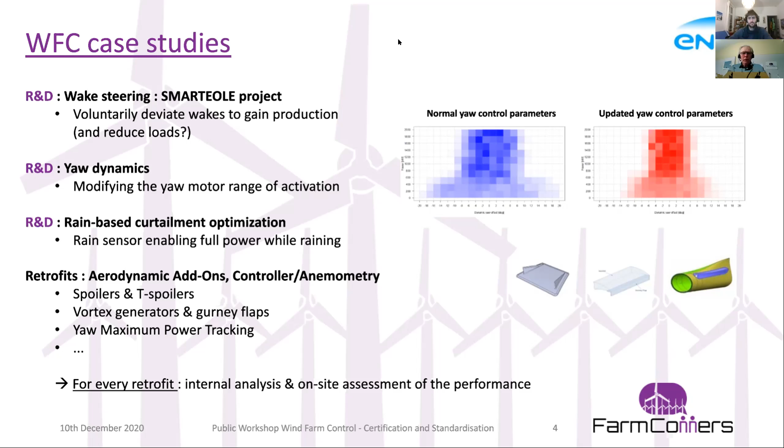Okay. We are well in time, and we have now some time for some discussions. I see that the number of participants has been reduced to almost 40, from I think we were some more.

But are there any ideas how to bring certification forward from the participants here? What could be thinkable measurements, not limiting the innovation, but assuring the innovation and making the innovations in wind farm control acceptable for the industry and the investors to apply? So I ask the round, what you think from your perspective would be a reasonable activity to verify wind farm control activity? Or is it uncritical because we have seen we have savings for the active power control and nothing is necessary? This could also be a position, the very opposite position maybe.